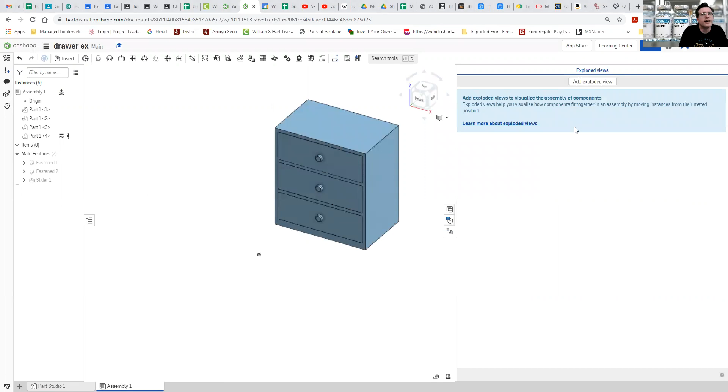Okay, so I'm going to show you how to make some exploded views and turn them into a drawing with a bill of material. So I'm going to take one of these example assemblies that we have here, and I'm going to explode it. So, you go from your part over to your assembly. And over here on the side, there's one that says exploded views, and you're going to click on that. Going to add an exploded view.

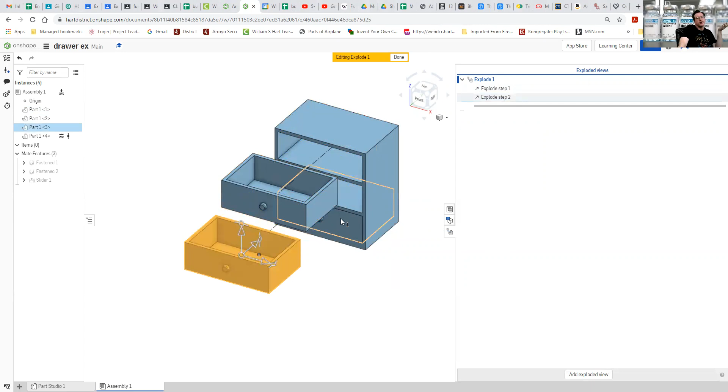When you do an exploded view, you're just going to click on each part, and you're going to try to move them apart so that you can see how this thing would be assembled. After you've moved an individual part, you hit the green check mark so you're not doing multiple at a time. I'm just going to have these nicely one after the other. There we go. There's an exploded view. When I'm done, I'm going to hit done. And then it goes away, and it looks like it was never exploded in the first place.

What I'm going to do, however, is I'm going to go over to make a new element. I'm going to make a drawing, same place you would go for your orthographic, but you're not doing an orthographic. You're going to do an exploded view with a bill of materials. So we're going to insert, and it says here Part Studio. Well, I don't want to do a Part Studio. I want to do an assembly. So I'm going to select the assembly.

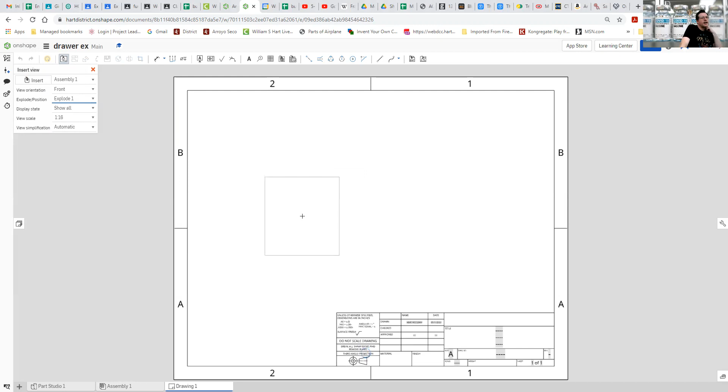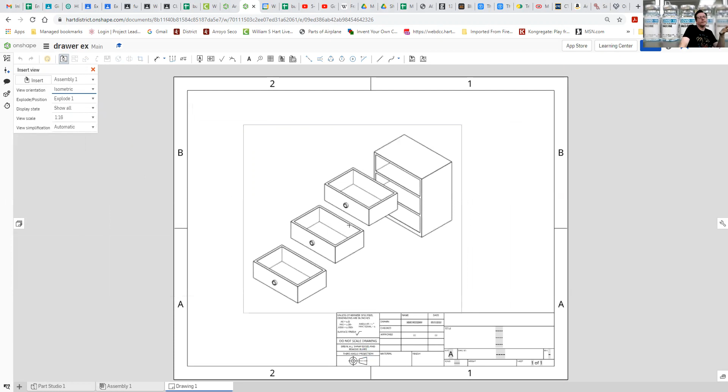And I say, hey, this looks wrong. What's wrong here? And there's a couple things. One, if you go over here, there's explode/position. You're going to change that from default to explode. And I head over here and I say, hey, this doesn't look any different. For my explosion, it doesn't look any different. For yours, it'll probably actually look different, just not the right view. You're going to go over here to view orientation. You're going to give it the isometric view. And now, there you go. And we only need one view because it's the exploded view.

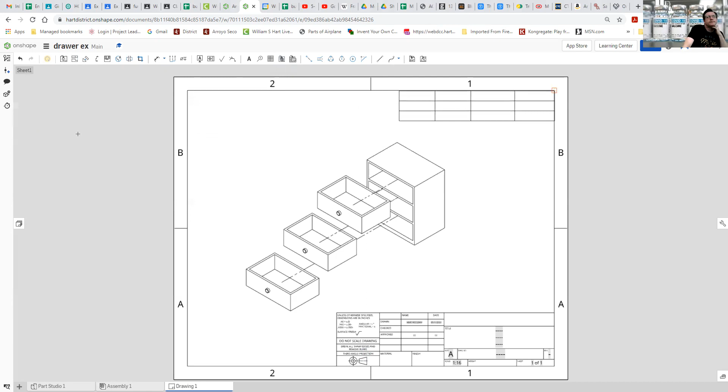However, I'm going to do some other things with it. I am going to put in a bill of materials table. Just drop that in there. And I can just drop on these little arrows. Let's say that's part 1. It's also part 1. It's also part 1. And that's part 2. You should have 4 parts because there should be 4 parts there. But if I look up here, there's no part number, there's no description. So I'm going to have to go back and I'm going to have to fix that.

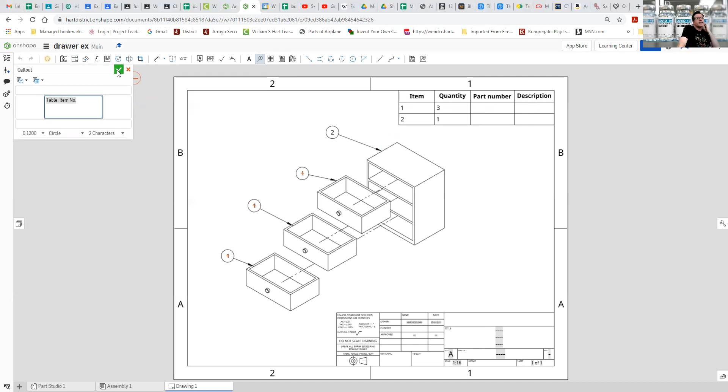Let's go over to the assembly. So let's do properties on part 1. Let's give it a description. Say, this is a drawer. Let's give it a part number. Drawer 1. Save. And let's do the same thing for this. Let's go properties. Cabinet, chest. Spell it right. Part number, cab 1. Save.

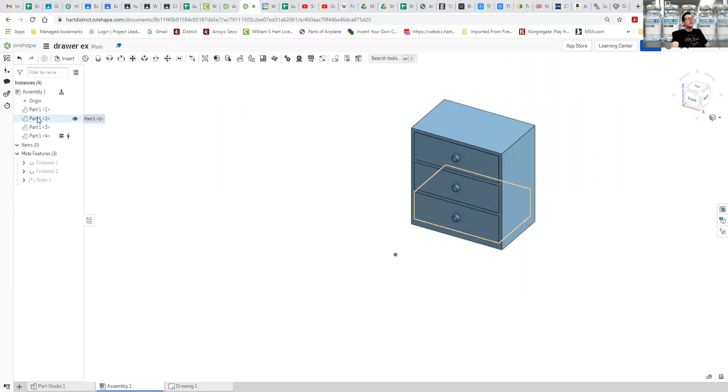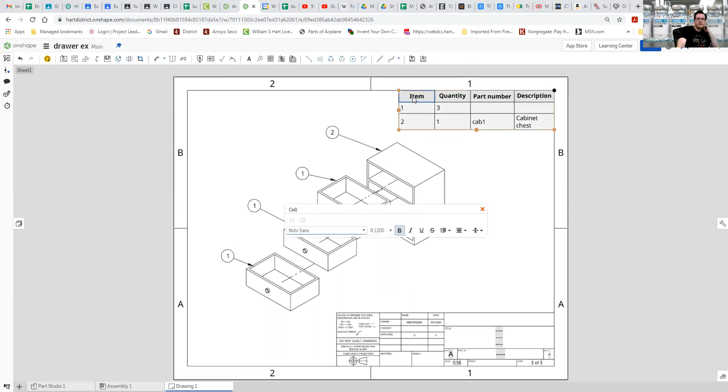Let's go back over to the drawing. Oh, interesting. It only fixed one of them. Let's go back over there. Let's make sure that, okay, these are all 3 parts have the same properties. All right, well, that's weird. Here's a way to fix it. Let's just do this. Let's hit delete. Oh, come on. Delete. And let's just drop it back in. No. All right. Delete the whole thing and drop it back in.

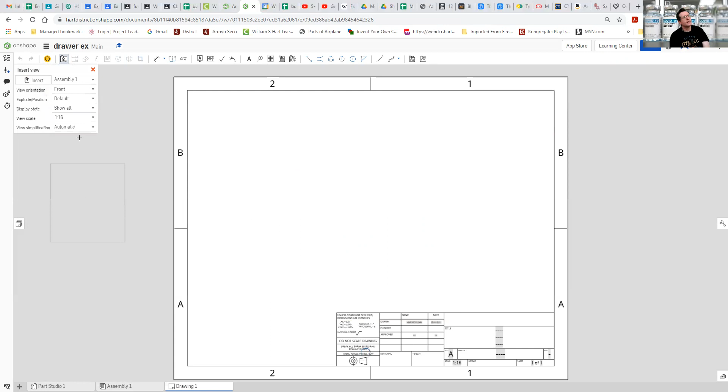Insert, assembly, not front but isometric, not default but explode 1, bill of materials, drop it in.

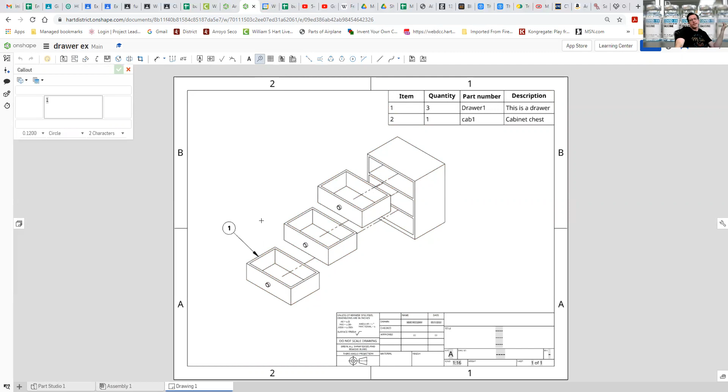This might seem like just a nothing thing, but it turns out a good portion of my job as an engineer. If you made anything, all of the parts had to be labeled. All of the parts had to be able to be called from the stock room so that they could actually put the stuff together. My bills of materials usually ended up with about 4 pages of different random stuff.

Oh, why is this not going? Let's go delete these. I must not have hit that right. And yeah, so we would enter into our manufacturing control thing. And of course, you know, say what this is. This is a cabinet. Explode assembly. And ta-da! There is the exploded view. That's what we're gonna be doing next.